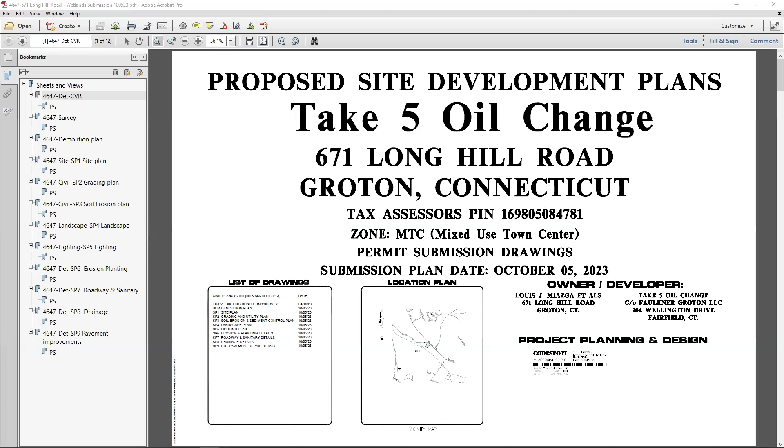Okay, much better, sorry for the technical difficulties here. But okay, my name's Bob Wee. I'm a licensed professional engineer with the firm of Codespoti and Associates, with offices located at 263 Boston Post Road in Orange, Connecticut. We're here tonight on behalf of the applicant, Faulkner Groton LLC. Jeff Kimberly is also online with us tonight to answer any questions with regards to the actual facility itself. The proposed project is for a Take 5 oil change drive-through facility, located at 671 Long Hill Road. What I'd like to do is turn everybody's attention to the survey and existing condition sheet.

I'll try to blow that area up a little bit better for us. Basically the property is approximately 0.89 acres in size. For past uses, there was formerly a restaurant on the site and parking areas, which are still in place. On our existing condition survey, you can see the outline of the parking which is existing out there today. The former restaurant was basically in that center portion of the island in through here. The restaurant has been demolished, so right now that's kind of a gravel and grass area that's grown in over the years.

Prior to the restaurant use, there was also a service station in the same general footprint area, up in this portion of the site. As you can see from this plan, the existing developed portion of the property occupies the upper two-thirds of the site, and the rear portion is lightly wooded with evidence of some past disturbances.

There's some debris piles in through here. We have an existing drainage easement and a storm drain pipe which outlets in the southwest corner of the property. This pipe picks up drainage from Meridian Street and a portion of Long Hill Road. All the flow from this pipe right now flows unabated through the outlet and discharges into a wetland system located on the southwest corner of the property, depicted in this shaded area.

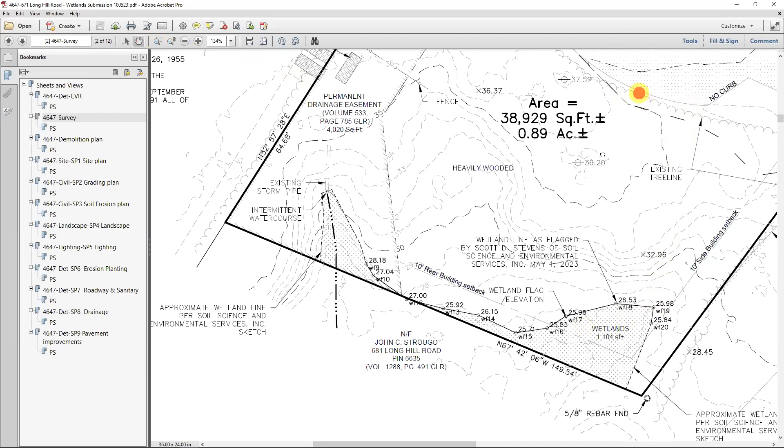The edge of the existing pavement right now is approximately 52 feet away from the wetlands at its closest point. There's also presently no stormwater management on site for dealing with water quality, volumes of runoff, or peak rates of discharge.

There are a couple of catch basins up along Long Hill Road—one here in the driveway, another one here—and that connects up to a drainage system that's presently out on Long Hill Road.

The topography of the site is set up so that there's basically a ridge line that runs through the middle portion of the developed area. So the north part basically drains through the pavement and grass area and gets out to Long Hill Road, intercepted by the catch basins, and then the roadway drainage system itself.

The rear portion of the property flows over the pavement and then overland flow coming down through a number of swales, eventually reaching the wetland system along the southern portion of the property. There's a swale here that discharges to the wetlands, and another swale that comes down through this portion that also contributes to the wetlands. The last swale is over the existing drainage pipe.

This swale receives runoff mostly from the adjacent property to the north and west of us. Based upon the topography, there's approximately 12 feet of topographic relief from the ridge line, at approximate elevation 37, draining down to a low point on the site of approximate elevation 25 along that portion of the wetlands.

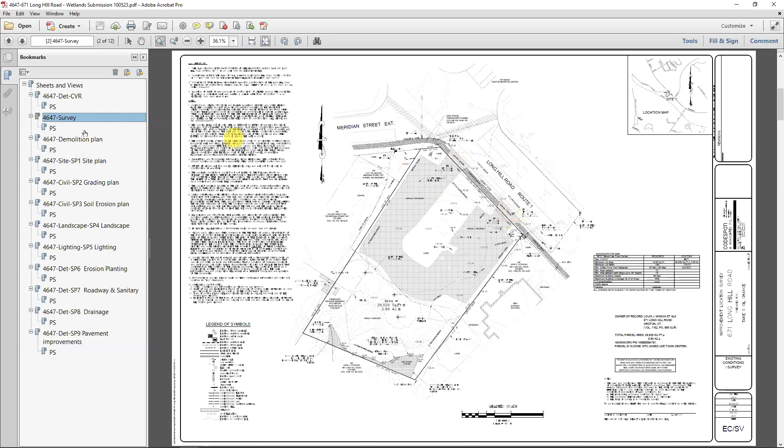So the traffic patterns—let me back up for a minute on the existing conditions. Right now there are presently two curb cuts going out to Long Hill Road. As part of our proposal, shown on sheet SP1 of the site plan, we are going to be removing the northerly curb cut up here, done in conjunction with DOT and in conversations with the planning department, given the proximity to the intersection. So the proposed project will only have one curb cut on Long Hill Road for entering and exiting.

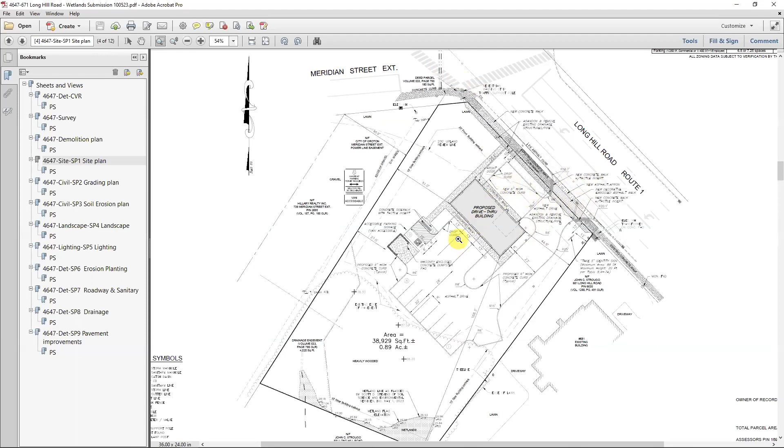The entrance will come in through here. You'll take a right-hand turn when you come in through the lube facility, which is a drive-through, exit through the south part of the building, and then exit back out onto Long Hill Road.

Right, you're right. But with that being said, the pavement area that's there, or the total amount of impervious coverage for the proposed plan, is actually going to be less than what's out there today. We'll be reducing the impervious area to 0.29 acres, which will result in smaller volumes and peak rates of runoff on the property if we were to do nothing in terms of stormwater management on the site.

We also reviewed DEEP's groundwater mapping, and for this particular area in this part of town, the groundwater is classified as GB, and is presumed not to be suitable for drinking water without treatment.

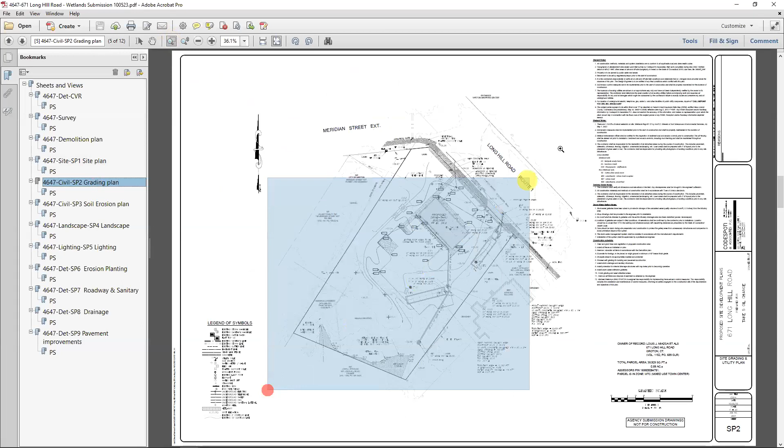So with that being said, that brings us to our proposed stormwater planning, shown on sheet SP2, which is the grading plan for the proposed development. As part of the stormwater management plan, we've incorporated several features to provide for water quality enhancements to the stormwater runoff, which will provide additional protection to the wetland systems that a portion of the drainage will discharge to.

We've included two proposed systems: one for the front, with the galleries and a water quality structure, and likewise for the rear, a water quality structure and galleries coming in through the back. So for both systems, the runoff...

from either the pavement or the roof will be collected through runoff onto the pavement or piping of the roof drainage, which will be directed to one of the two water quality structures. Both are hydrodynamic separators, providing treatment of the stormwater runoff that reaches it, for removal of suspended solids and floatables.

From there, after the water quality structure, the runoff will be directed to a diversion structure, where the low flows and the water quality volume of runoff will be directed into one of the two galleries—this one being the north, and this one being the south or rear system. So basically, the entire water quality volume for the project will be collected and retained in both of those gallery systems.

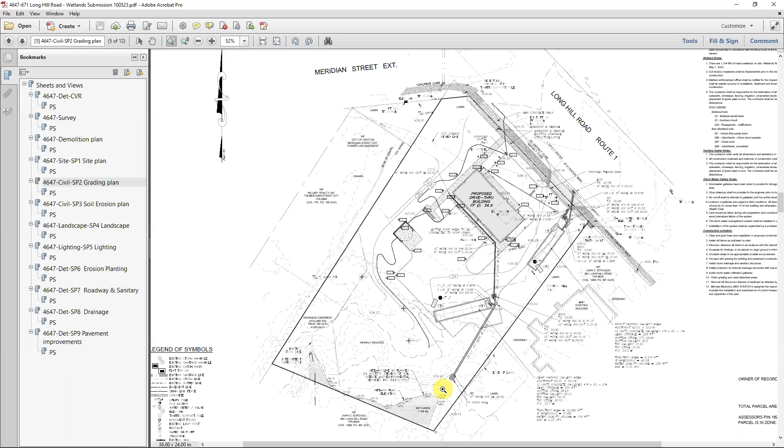By retaining the water quality volume for each system, a decrease of 100% of the DCIA, or directly connected impervious areas, from the developed portion of the site will be obtained. That meets the requirement for the MS4, both for the Town of Groton and the State of Connecticut DEEP MS4 permits.

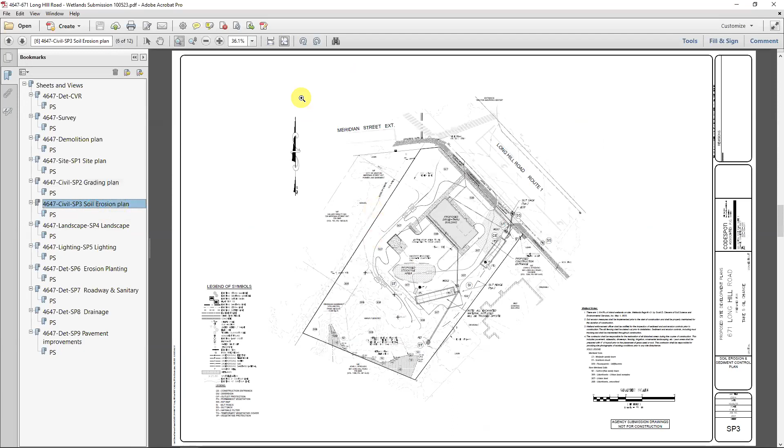During construction, the site and wetlands will be protected from erosion with the inclusion of a detailed soil erosion and sediment control plan, shown on sheet SP3 of the drawings. Basically, it includes the typical devices I'm sure this commission is familiar with.

We have silt fencing, which will be provided at all the downstream areas and cleared areas to prevent runoff from traveling downstream toward the wetlands. We've also included silt sacks on the existing catch basins to prevent any runoff from the construction area from getting into the catch basin systems. And as noted before, we have hay bales at the outlet side of the scour hole to collect and treat the runoff coming through that area.

So that pretty much wraps up my quick summary and overview of the project, and hopefully you're able to follow along with that. If the commission has any questions, we'll try to get those answered. Jeff is also on the line to address any of the operational functions of the proposal.

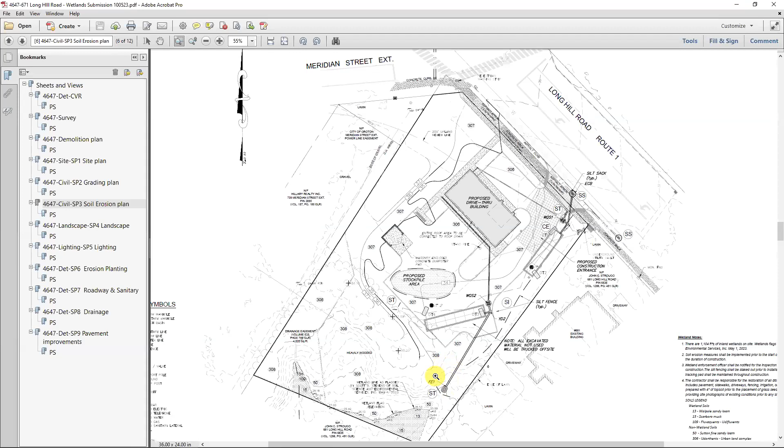Thank you, Bob. I have a question. Yes.

Did you say what the building is going to be used for? Did I miss that? Yes, absolutely. Go ahead, Bob. No, go ahead, Jeff.

Sure. Hello, everyone, this is Jeff Kimberly. I live in Fairfield, Connecticut. We're developing Take 5 drive-through oil change facilities throughout Connecticut. This will be our fourth one. We have one up in Norwich that we're building, and two a little further out west that are already up and running.

So it's a fairly simple concept. As Bob noted, it's a 1,700 square foot building. It typically does about 20 to 50 cars per day, so traffic is pretty minimal. There's no basement in these buildings, and there are no lifts, which can sometimes be something you need to be careful with environmentally. So it's a fairly simple, fast, and convenient offering to the community, doing about 20 to 50 cars per day.

It's a fully contained system. All the used oil is placed into a used oil tank and that is recycled. Safety-Kleen comes by and picks that up for us. The new oil is placed in above-ground tote tanks that sit in the main bay next to the drive-through galleries. It's a fully contained system. There's no drains within the bays where oil could leak down into the water system. Everything is fully contained and put into the used oil tank. That's what we're offering, and we're excited to potentially be developing this in the town of Groton.

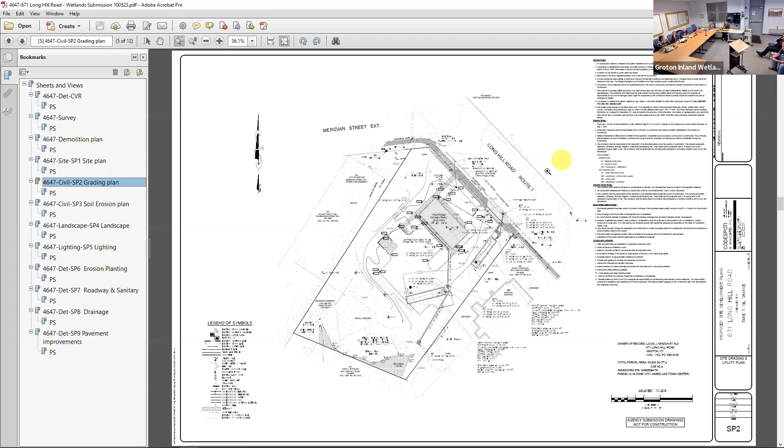We need an arrow with the buildings there, so they're going to come in. What are those two things south of the building that look like structures underground? I think those are the infiltration structures for the stormwater facilities. Are those the two long things there? I'll show you. Just don't touch the screen because it's a touch screen. Okay, where's highlighting?

That's the dumpster. Oh, a dumpster, with a fence around it. Exactly. And what's that? There's a sidewalk there and it looks like a parking area. Oh, I can basically tell that's the green area without it.

How often does the used oil get picked up? Well, it depends. A company called Safety-Kleen picks it up, and actually some of our facilities use the used oil to actually heat the facility, but we're planning natural gas here.

The other thing I should mention is that these are drive-through facilities, so customers stay in their car. There are a few parking spaces, but those are mostly just for employees. The customers are allowed to stay in their car for convenience and comfort, and it's usually 10 minutes or so to be in and out. You drive right through, you don't need an appointment. So that's the offering.

I have a question about the drainage easement on the southwest. I've lost my train of thought on the drainage easement. I think I might have misunderstood you. Is there a pipe coming from a catch basin on Meridian Street? Could you tell me a little bit more about that?

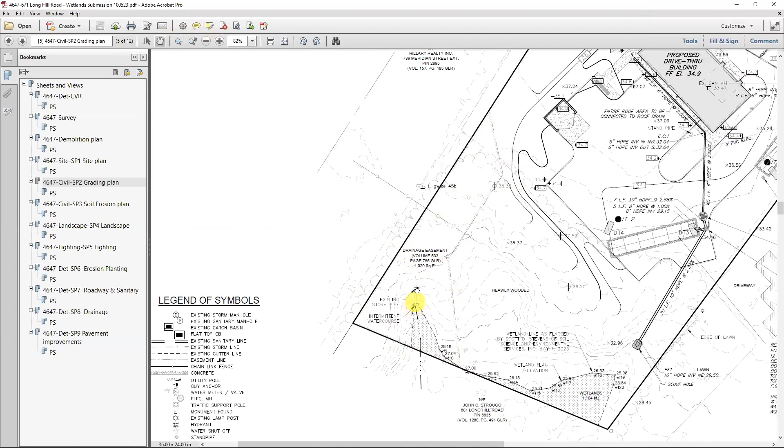Yes, the easement is crosshatched here and basically encompasses that southwest portion of the property. The pipe discharges to the wetlands right about here, and then it connects up to a manhole on Meridian in this approximate location. That manhole receives runoff from this catch basin and a couple of catch basins a little bit further to the west.

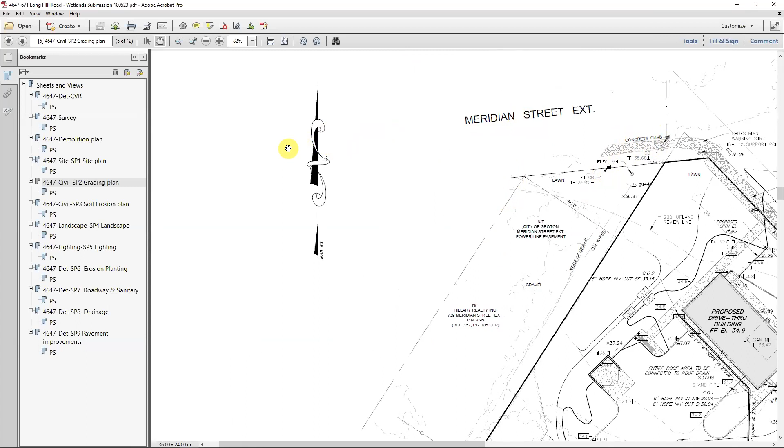Are there separators in the road there, or what kind of system is it? Yeah, I don't believe that there's any treatment provided in that drainage system, and again, that's your municipal system that discharges all that water. I think from the catch basins that I looked at up in here, they look like typical catch basins. It didn't look like there was any treatment being provided in there.

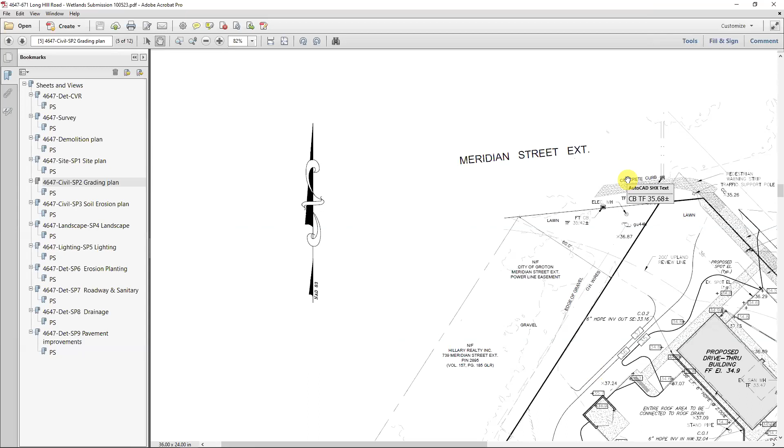Is there anything that you could put at that outlet that would help with any of that? Well, I mean, that's really not the location to do anything with that, and quite frankly that's not our stormwater, and that's an easement that does not belong to us. It's an easement that's granted to others.

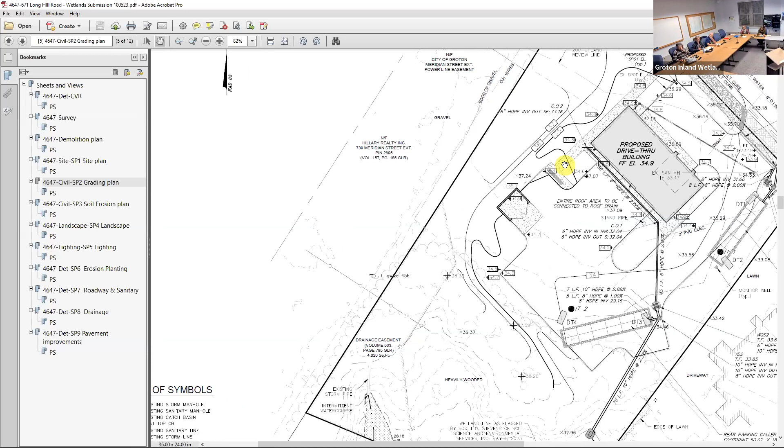Got it, thanks. So we have a staff review scheduled toward the end of the month. One of the first projects that I reviewed when I started here was the reconstruction of Meridian Street, so I will pull those plans and see what exactly was put in there. I don't remember whether or not water quality was an issue at that point.

So you folks want to walk the site? I don't think I need to, I'm pretty familiar with it. Okay, are you comfortable classifying it?

I make a motion to classify the Take 5 drive-through oil change on Long Hill Road, 671, as minor. Second it. Okay, discussion. All those in favor signify by saying aye. Aye. Opposed, abstentions. All right.

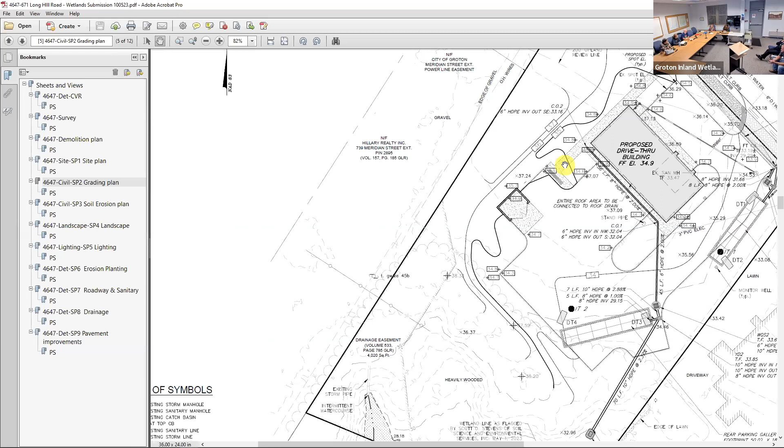I may go out there and walk down the back just to look at it. You can pull in there and park pretty easily. If you all want to do it on your own.

Pretty familiar with it. A friend of mine used to have a restaurant there in the 70s. Some kind of fish thing, I don't remember the name. It's been vacant and empty for a while. We were just getting started. He used to give us coupons all the time. We ate a lot of fish.

Industrial building, 115 Leonard. So you've seen this and walked the site, some of you haven't, but we have reviewed the revised plans, and all the comments have been satisfied at this point, so I have a motion for you tonight. We also have the applicant here, she can present. It's up to you.

Well, I mean, it's definitely a pretty easy site, being almost dead level and gravel, and as long as they're not penetrating back into the woods and the wetlands in the back, then I don't have any problems with it.

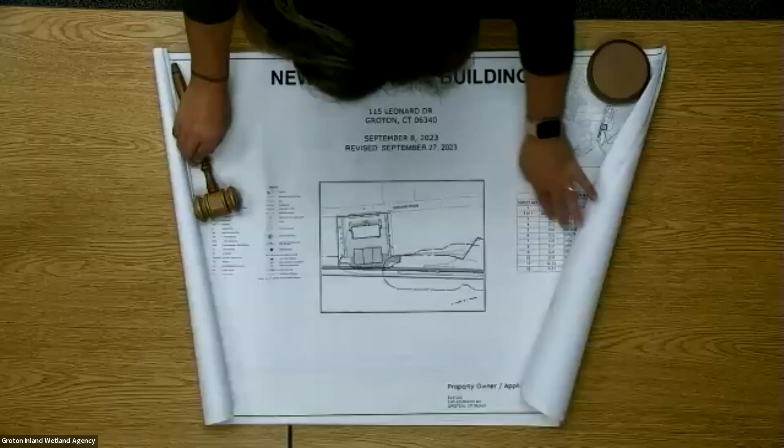Oh, you want to turn it the other way? There should be rocks in there. I always brought rocks home for Deb during my trips. She could throw them when she goes to council meetings.

I feel like you're here, but we might as well. Do I need to turn this on? You can just take it out. Yeah, would you please? That'd be great. Thank you, just pull it out.

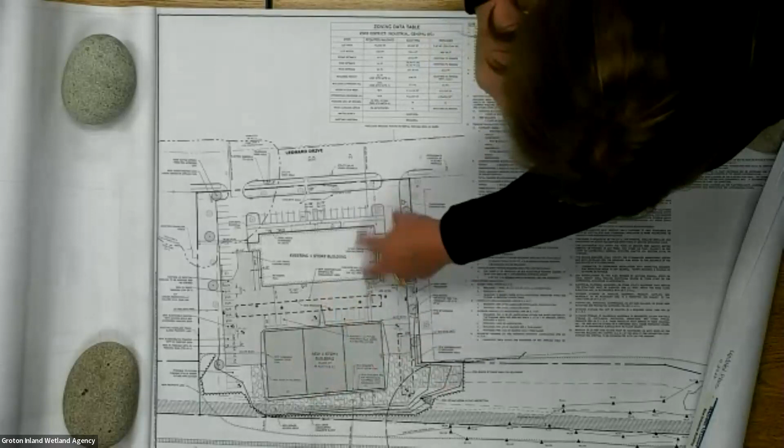Good evening, Susan Marquardt, professional engineer with Loureiro Engineering. We also have John Luther here, the owner and applicant. So like we mentioned at the last meeting and on the site walk, a new industrial building at the rear of the property. When we were out there, we looked at the edge of where the wetlands were.

Basically the only thing on the revised plans was just a little more detailing of the stormwater and a couple of details. So that's the only thing that's changed since we were before you last time.

Question? I don't have any problem with them. I don't even. Make a motion to approve the industrial building at 115 Leonard Drive.

This permit is subject to the four standard conditions and the following modifications. Any modification to the work in the upland review area or the wetlands imposed by a federal, state, or local agency shall require additional review by town staff or inland wetlands agency, whichever is appropriate. And number two, the construction sequence will be revised to reflect a pre-construction meeting that shall be held prior to installation of the silt fence, and an inspection by town staff shall occur after this installation.

Second it. Other discussion? All those in favor signify by saying aye. Aye. Opposed? Thank you very much. We didn't even have to use the rocks.

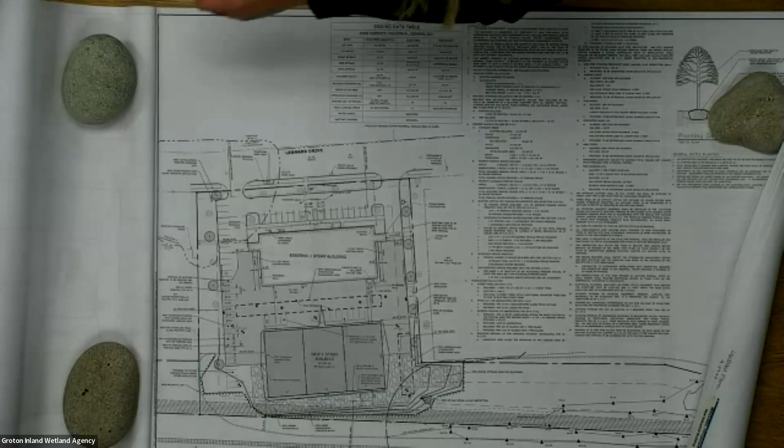All right, Seaport Community Church re-subdivision. So we just went out on a site visit for that and they are revising their plans, so we're waiting for the revised plans. Okay.

Is that the same church that we okayed a parking lot or more parking spaces for? There are two churches up there on Route 184, and both of them have wetland permits, so I'm not sure which one you're thinking. I think this one wasn't on 184. Well, maybe, I don't know where it was, but it was up there somewhere. You're thinking Tollgate Road. Yeah, okay, that's a different church.